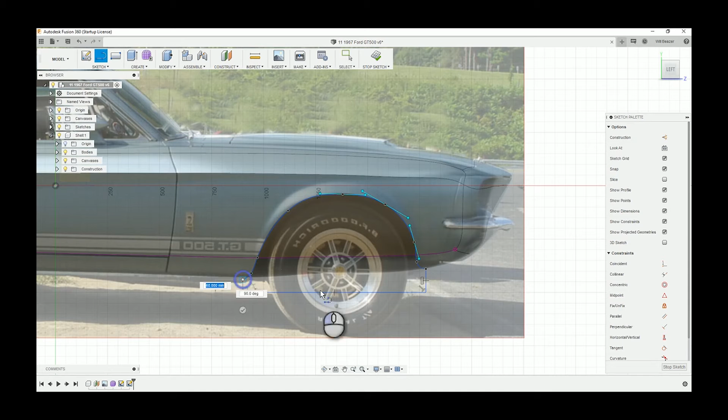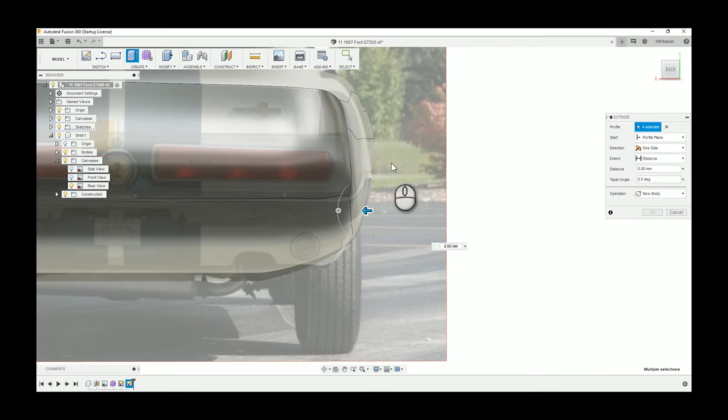So last time I sketched the wheel arches by just using the canvas and the fit spline tool. So here I am selecting the profiles I want to extrude and extruding them across. So naturally, when you extrude into a body that's already been made, it changes to a cut tool, which is that red. The red tells you it's using a cut. But say if you want to join it on, there's that drop down menu at the bottom and you just click join instead.

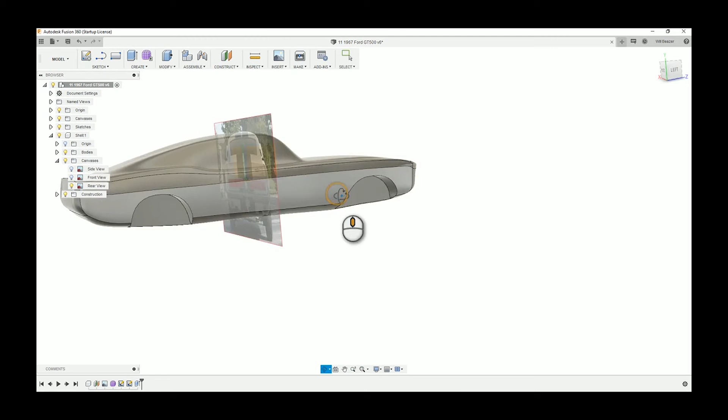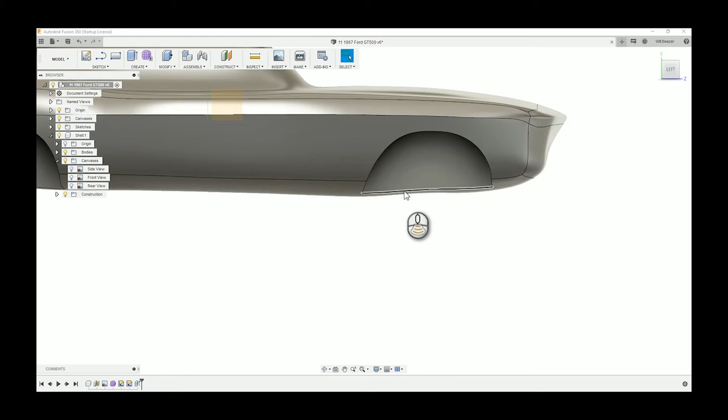I should mention, these wheel arches at this point in time, they are purely for aesthetics. They're not functional, they're not to hide the axle or the coil springs or whatever. They're just purely for an aesthetic reason. I could have done them a bit better, but at this stage I was just, let's start getting some features in, and then we can make all the tweaks we want when we're nearing the end. So I'm happy with that.

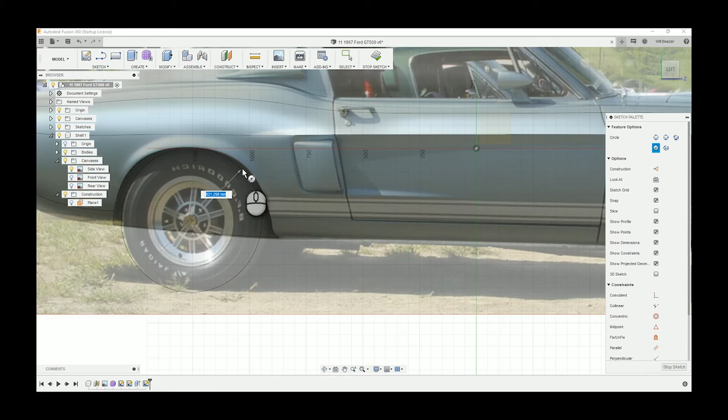So what I do now is I want to create a sketch to create the wheel, the first wheel anyway. So click create sketch. I want to find the plane. That's the plane I want to use. Then I hover over the wheel and I want to draw a circle. So I have that bound with my keys. So every time I press the letter C, it comes up with the create circle tool.

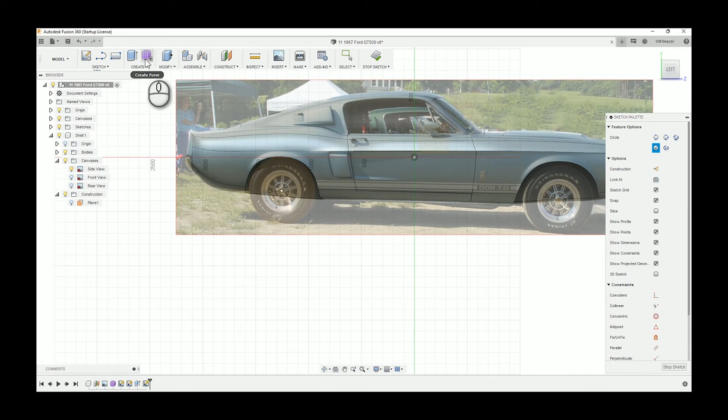And you can do that as well if you go into the sketch drop down list. If you move to the far right of any sketch tool, so say it says draw 3-point circle, there's 3 dots on the end, and it's like, do you want to make a shortcut for this? And then click yes, and you type in whatever letter. So C for me is circle. That's how I was able to draw that so quickly.

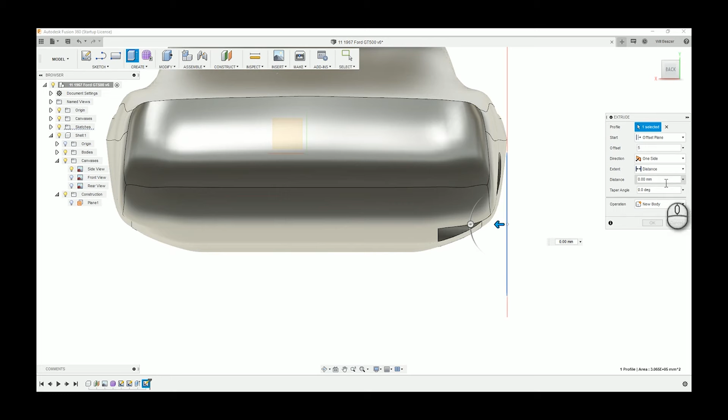And here I'm extruding the wheel across. So I'm actually offsetting this from the plane because the wheel isn't as far out as the sketch plane I drew it on. But first I'll offset it just to make it easier for myself. So there we go, just chucking in a random value. But yeah, I want to click and drag that and extrude it across. So because it's overlapping, it's actually used the cut tool here.

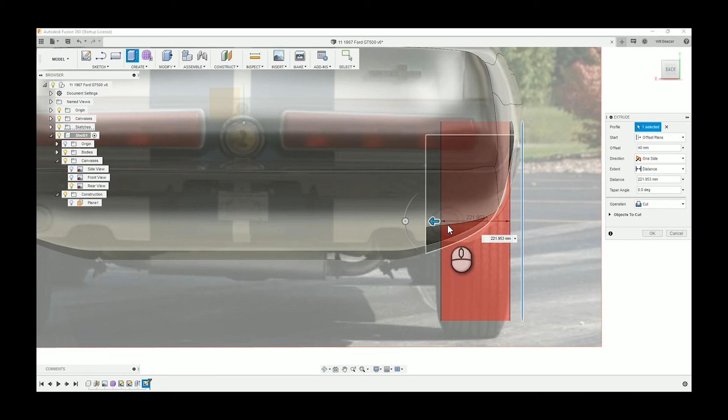And what I should do is at the very bottom of those tools on the right hand side in the drop down list that says cut, I should click new body, and I make the mistake of clicking join. I go back to fix it later, but just worth mentioning now, you don't want to click join because when you go to move it or mirror it or create a pattern out of it, you'll be patterning the whole car as well. So say you mirror the rear wheel on the right across to the left hand side, you'd also mirror the car and basically create an overlapping body, which is just a computer nightmare.

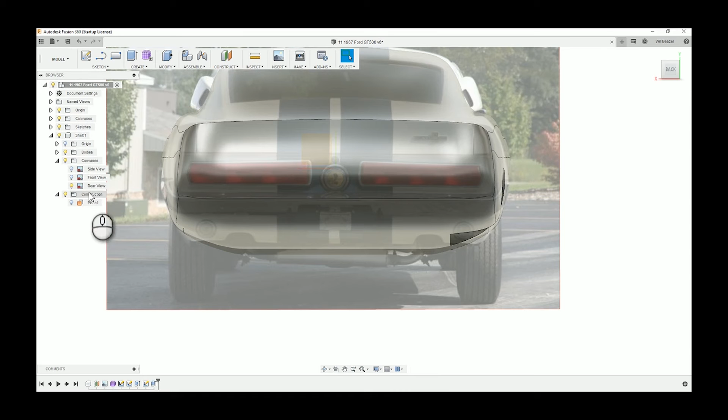So there, it was set to cut. So I need to edit that feature. And like I said, I clicked join, but I should have clicked new body, because now that becomes one body with the car. That's not its own separate thing. You can still edit it, but yeah, like I said, when it comes to mirroring things or moving things about, you'll be moving the whole car as well.

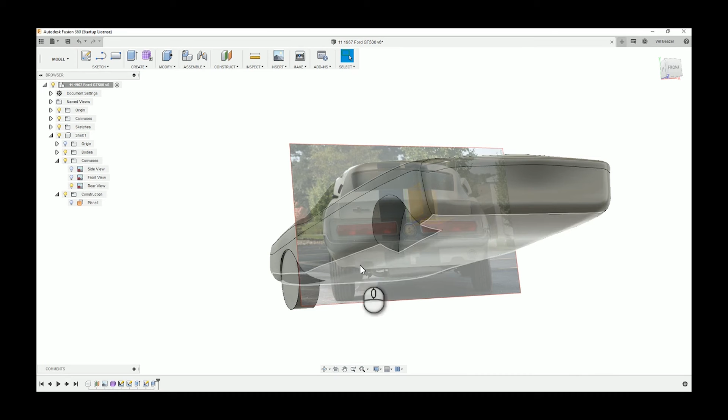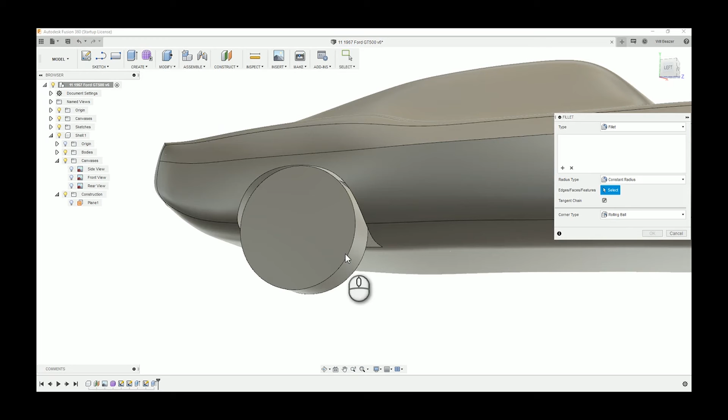So because wheels aren't perfect cylinders, they curve around at the edges, the next step I want to do is fillet the edges of the tyre. And again, this is a mistake I make looking back on it now that I know the tools I could have used. I click the fillet tool, and in the top of that table on the right hand side it says fillet, and there's a drop down menu, and you can also click rule fillet. So if you click fillet as standard, you have to select each individual edge that you want to fillet.

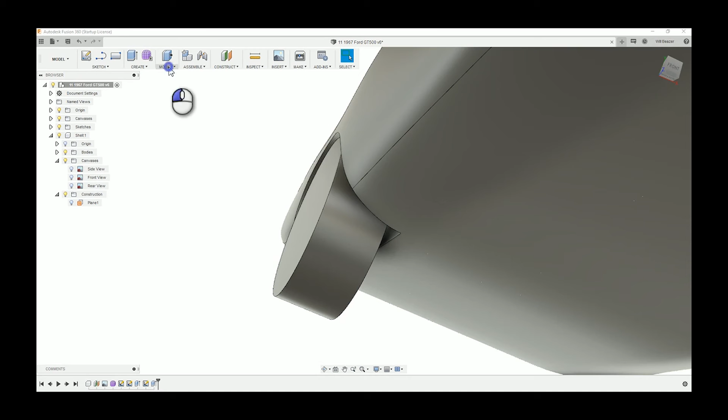But had I created the wheel as a new body and not joined it onto the rest of the car, then I could have used the rule fillet tool, where I could have clicked on the wheel and then just entered a value, and it would have filleted both sides automatically for me. So it would have saved me time, and it would reduce my steps in the feature tree. And it's definitely good practice to do the steps that make the most sense.

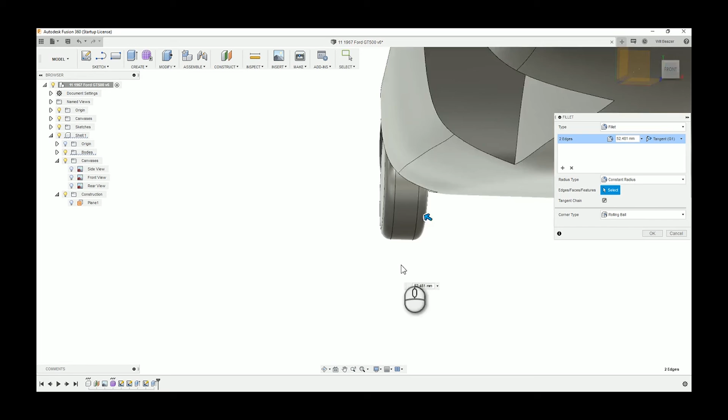I know that sounds ridiculous, but sometimes when you're modeling for as long as I was during this project, you start to just make silly mistakes. But there's also a lot of mistakes I make just because I wasn't aware of better ways of doing it, or at least on this program.

So here I'm creating a sketch. I clicked on the wheel, so you don't always have to click on a plane. You can just click on a body as long as it's got a flat surface. And then again, drawing a circle.

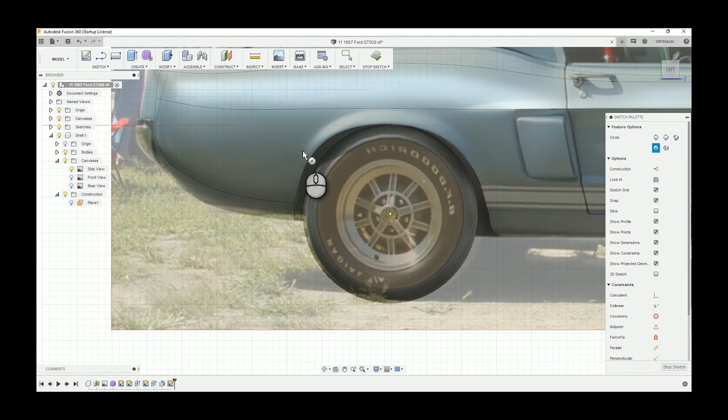No dimensioning here, I'm just drawing it to match that up. Realistically, I could dimension this bit here. There wouldn't be any harm in me doing that, but I don't think I do. And I could open up this model and add in some dimensions if I wanted to be a bit more accurate. But again, like I've said in previous videos, this is just an aesthetic model. It doesn't have to be perfect.

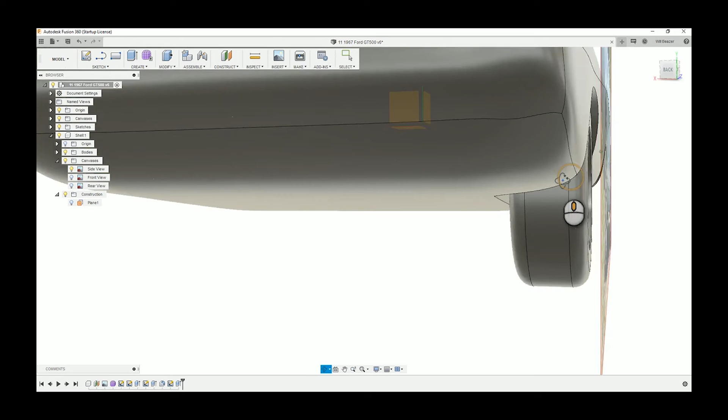So yeah, extruding that to about 20 mil. Extrude cut. So I have a look at that. Turn off that canvas, and it doesn't look deep enough to me. I probably want about double the depth. So I do that by clicking edit feature in the bottom, and then just changing that measurement. So that depth is like 40 mil, something I'm happy with.

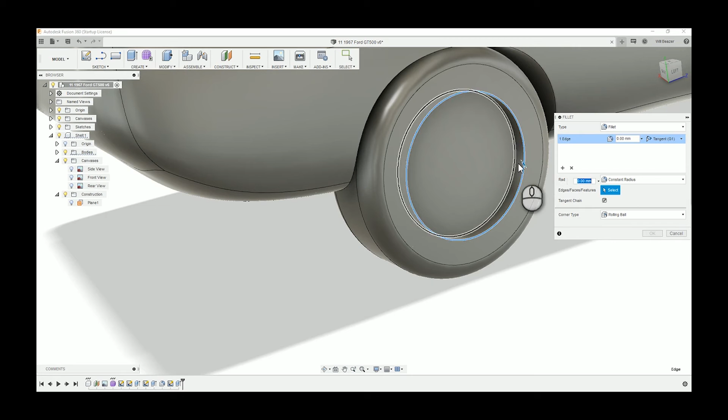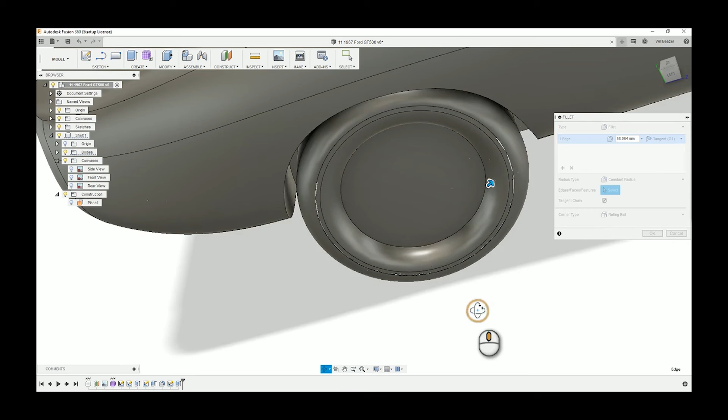So what you're now witnessing is a bit of poor model procedure. Here I've just done a cut, and then I've just done a fillet, and I do that a few times in this project in later videos. But with things like this, I know I'm going to have to fillet this wheel again for other edges. So doing a cut after a fillet, what you actually do is create more problems in your feature tree at the bottom, and it's just going to be more taxing on your computer. So I'm kind of happy with how that looks.

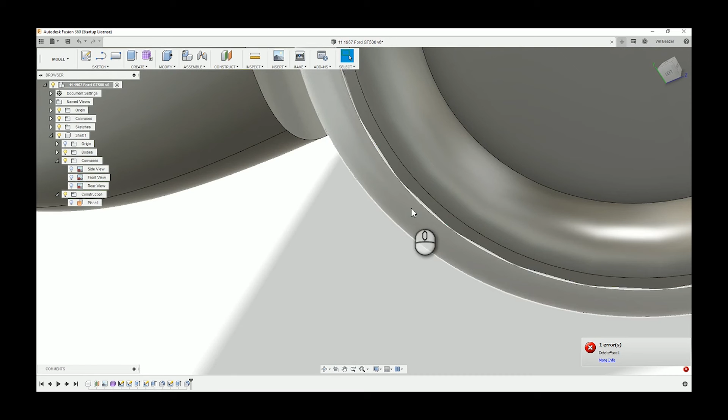And then I zoom in and I notice this. So what all this is here is a compute error. There's nothing wrong with it. The model is perfectly functional. I could take it out and 3D print it, and there would be no problems. But it is a good habit to get into. Whenever you spot something like this, just see if you can do something to fix it. Because if you ignore a lot of your problems, then your CAD projects will fail eventually if you just keep ignoring the problems on it.

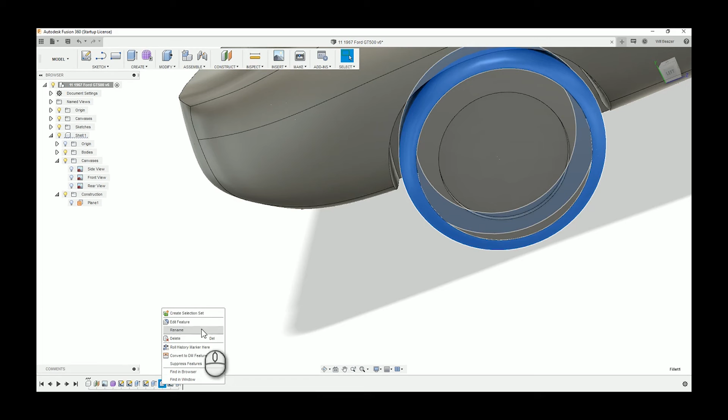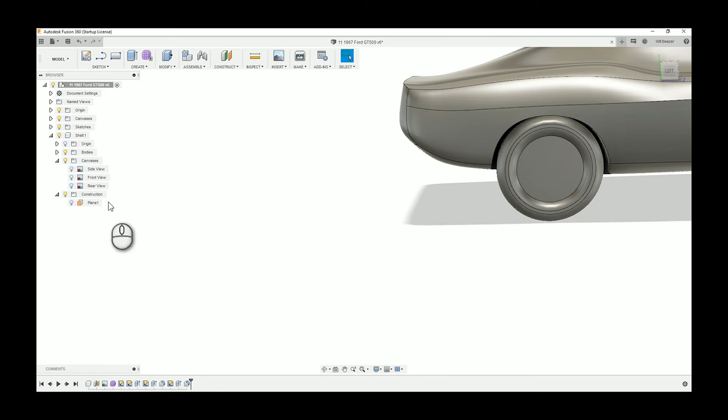So I just wanted to see if I could fix this, but I do recognize there is actually nothing wrong with what's going on. It was just a bit annoying, to be honest. So I was just seeing if I could fix it, and the fix was to just edit the feature and do absolutely no editing, just clicking OK again, and it worked the second time around. But yeah, just a good habit to get into. So that's looking a lot better.

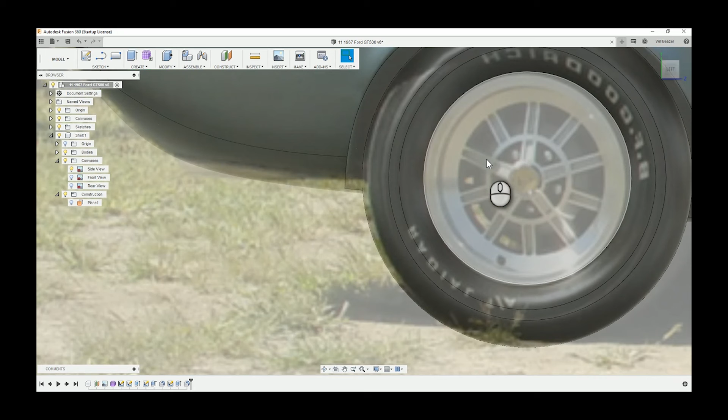So as I've said before, this wheel is still joined on to the car, and I will change that shortly. But first, what I want to do is create a plane that is perpendicular to this view that I'm looking at, which sits halfway between the two sides of the wheel. If that makes any sense, you'll see what I mean in a minute. But the way I go about this is fairly moronic. What I do is I create a sketch from one side and then extrude up to it.

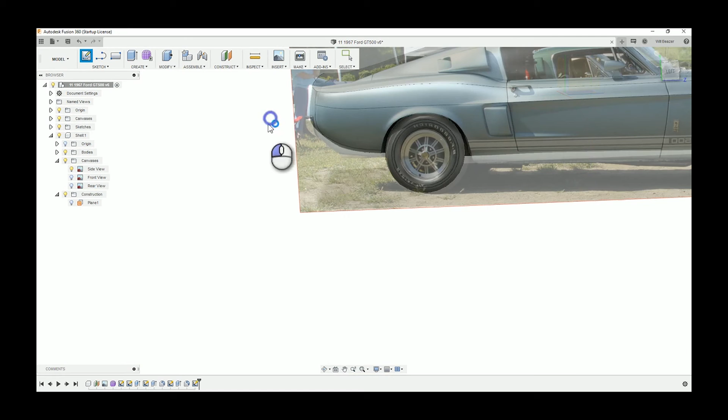What I could be doing here, instead of creating a sketch, is in the construct tool, the drop down at the top, there's construct offset plane, but there's also construct axis through cylinder or cone. So if the wheel was set to a body rather than joined onto the car, I would construct an axis through it, and then I would extrude a plane up to that object, and I would solve my problems. But instead, what I've done is I create a little sketch, and then I extrude up to it.

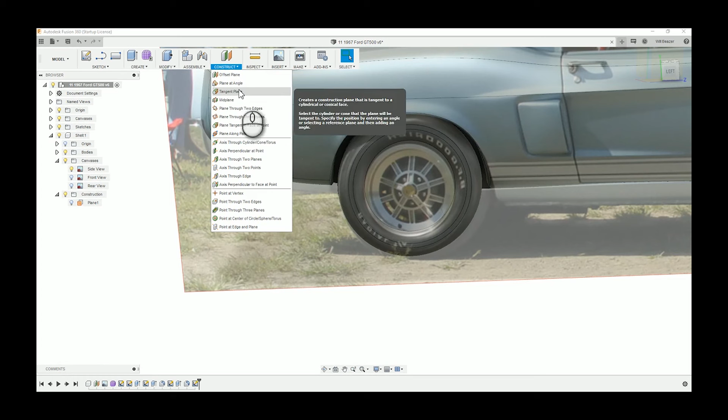So here's the construct drop down, so offset plane, and what I want is a plane that's on level with where I've just clicked. Trying to think what the plane would be called. The front to back plane. I don't know. A plane perpendicular to the side view. So perpendicular to what I'm looking at now.

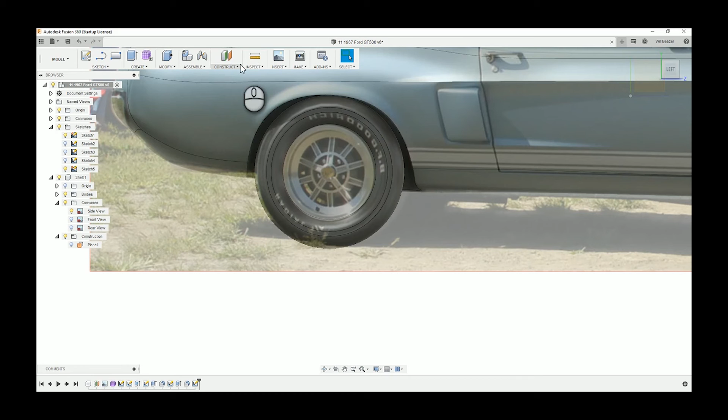And you'll see there's that arrow on the top right hand side, and I can drag the plane. But what I should do is in the drop down menu on that table for the offset plane, instead of distance, you can click to object. So it moves it up to an object. See where it says distance on that table? Then click to object, and then I can click on that sketch. There we go. And now the plane is where I want it to be.

But from being a bit more experienced now, I do know that's not the best way to do it. So like I said earlier, just construct an axis through the cylinder, through the wheel.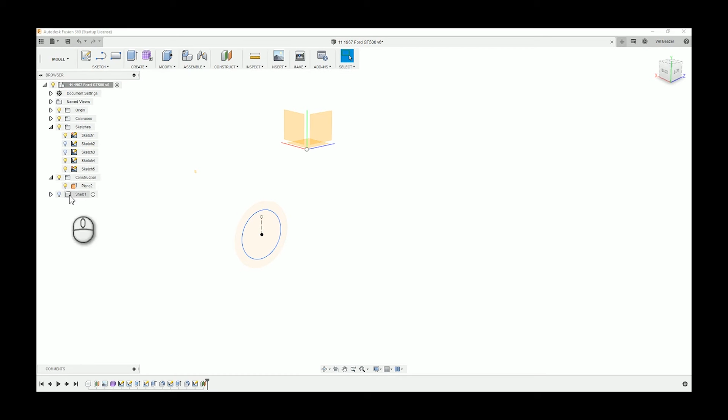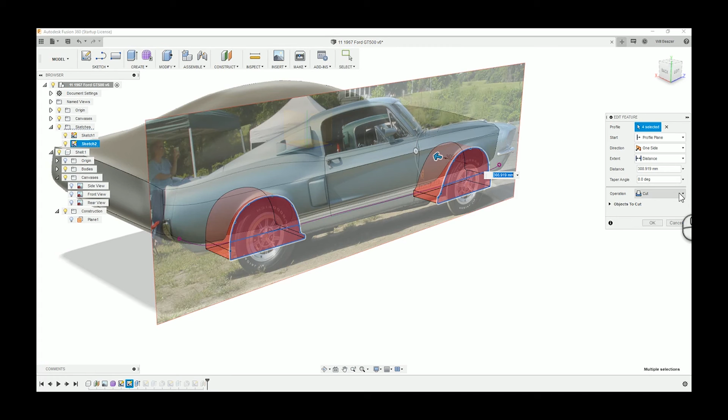That plane that I've just created is actually really hard to see. If you look left of the tyre and up a bit, it was just in the screen there, but I couldn't find it for a little while. Luckily I didn't need it right away, but sometimes that will happen when you create a new plane. Sometimes they create them massive, sometimes they create them tiny. I honestly have no idea why it happens, but I was struggling to see it.

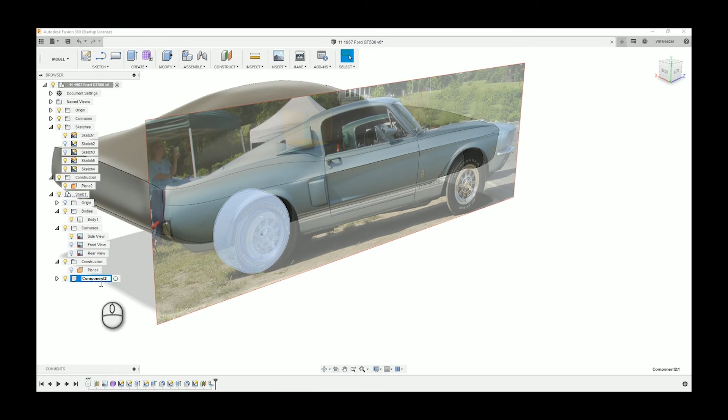So here we go. I'm changing the wheel from a join to a new body, and now I can create a component from it. I do that by going into the bodies, finding the body, right clicking, create components from bodies. So now that's in the top tier of the tree on the left, and I can rename that by double clicking and then typing in wheel.

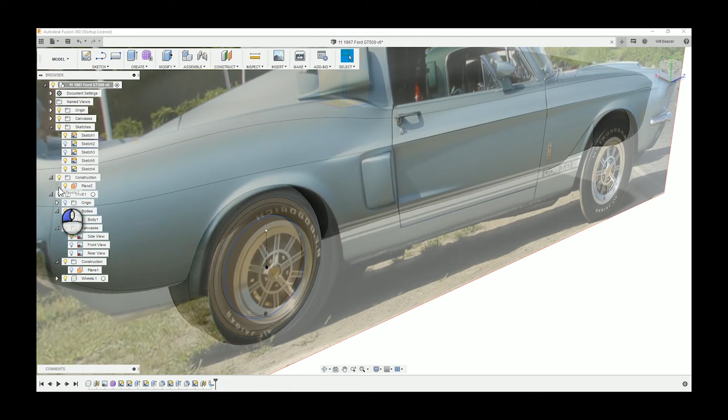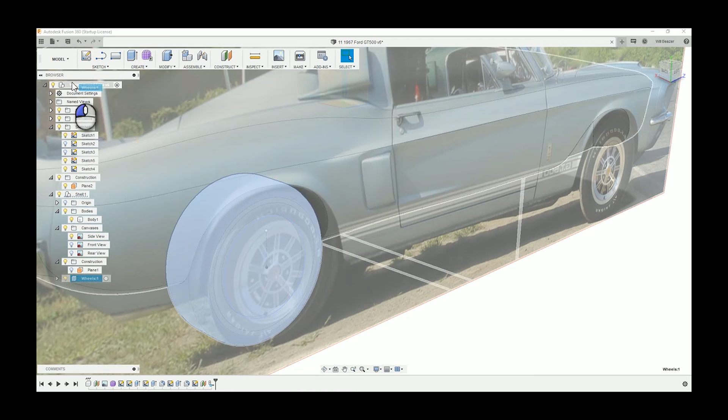You should get into a good habit of good naming conventions when modeling. For a car, it's really easy. There's only so many parts. It's like rear wheel right, rear wheel left, etc. But on a project where, say you were making a chest of drawers, there's a lot of parts of wood, and you don't really know what their names are. They're just panels, and calling them panel 1, panel 2, etc. is quite difficult. You should try and figure out a good naming convention that works for you. I still haven't mastered good naming conventions, but it's something you should try and practice.

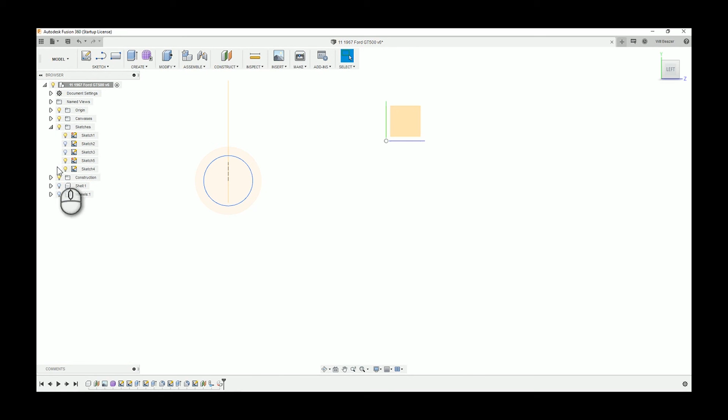So now there's that plane that I couldn't find before. It was tiny, and now I dragged the corners out to make it a lot bigger. Now you see what I mean. It's a plane that's perpendicular to the wheel in the dead center. What I'm about to do now is another thing that, if I did it now, I just wouldn't have done it this way. What I'm going to do is draw an axis. Like I said, you can just construct an axis. It's so much easier: construct axis through cylinder, and then just click on the wheel. But instead I draw a sketch from a perpendicular view to this.

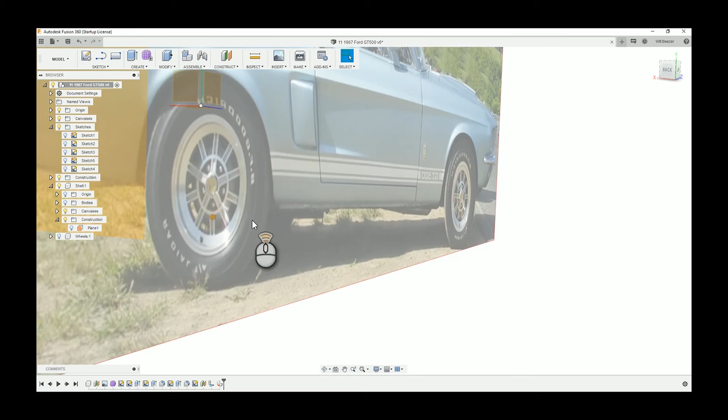Just having a look at the wheel to make sure I know what I'm doing. What I want to do now is turn on that wheel. I think I turned on the car first. I didn't mean to do that, but show the wheel, and then by clicking on a body and holding, you get a little drop down menu of entities that you can't see directly, and there we go, there's that line.

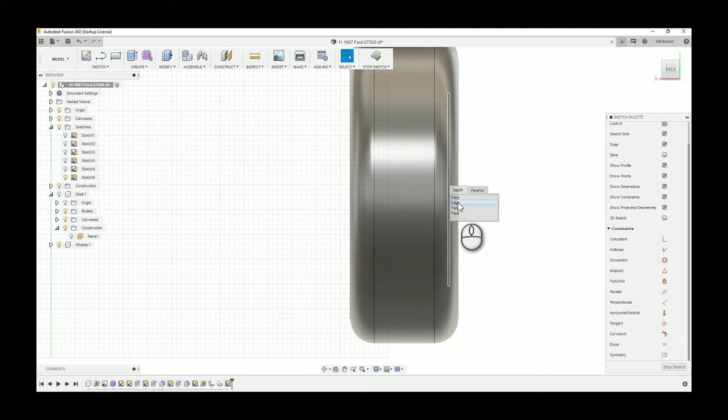So that's the inner circle that I cut in before, and then very quickly I used the project tool. Again, that's another key I have bound. I bound that to the letter P because it's unused for anything else. But you can find the project tool in the drop down menu on the sketch tools at the top.

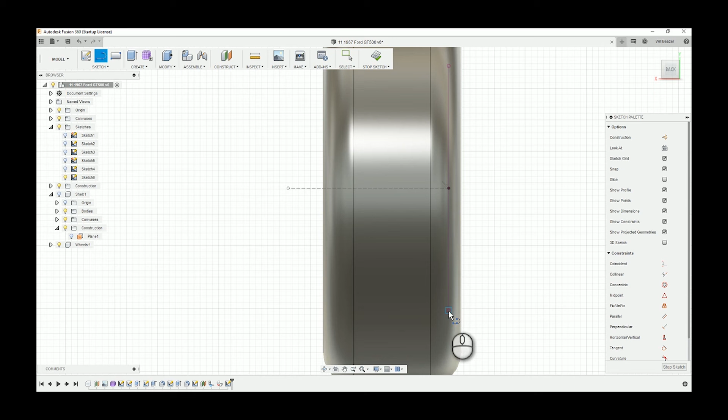And this is me making an axis. I needed to create an axis, and had I known about the better way of doing it, I would have done it the other way. So just construct axis through cylinder. I'm sorry, I feel like I'm repeating this a lot, but it's a tool that I completely wasn't aware of, and it's so much easier.

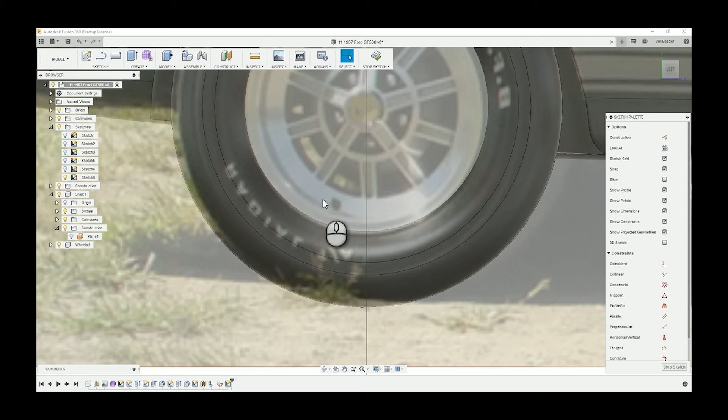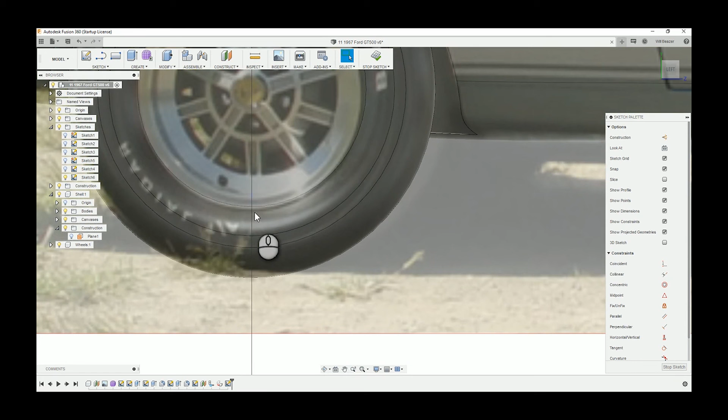So now what I want to do is create the shape, because this wheel goes in, but then it comes back out again. What I want to do is create a sketch from that new plane I've created that's perpendicular to this view, then rotate it, and have that join onto the current wheel to set me up ready for the next stage. You'll see what I mean in a minute. It was not the best explanation, but you'll understand what I mean in a moment.

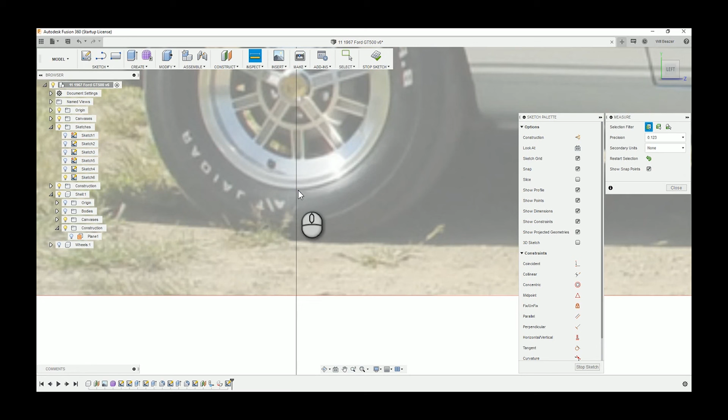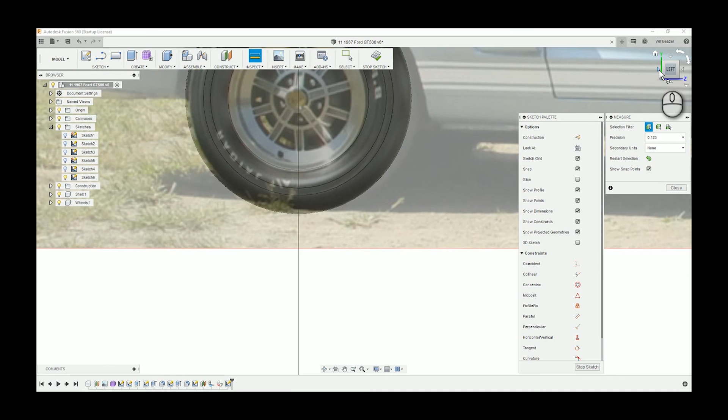What I could do from this angle is, in the sketch drop-down menu, you can create points, and I could have created points at each stage of the wheel from this angle, and then rotated it back round to the angle I'm about to work on, and I would have been able to see them rather than doing all those sketches.

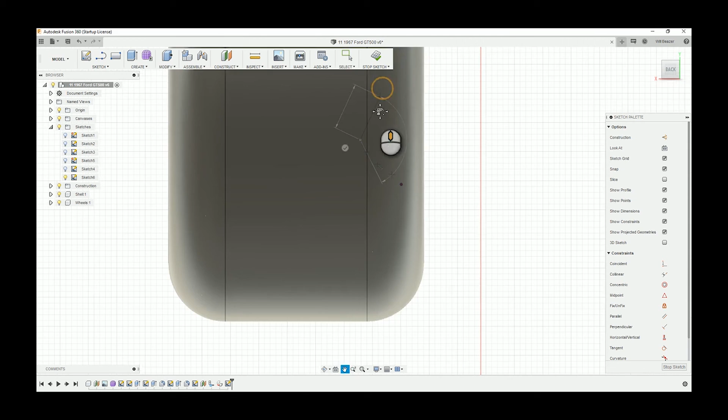So in this part of the sketch, I actually dimension some things, which I don't think I've done at all for the rest of the project, really, like not proper constraining. And the reason why is that in this case, it makes it very easy to edit by having some dimensions in there. Not always, you know. Sometimes it's not necessary. If you're just going to be happy with it straight away, then fine. But I thought I was going to encounter a few errors with this, so I thought I'd chuck in some constraints and play on the safe side.

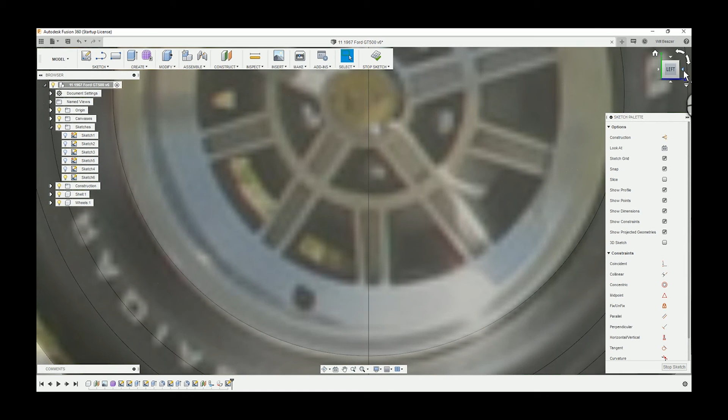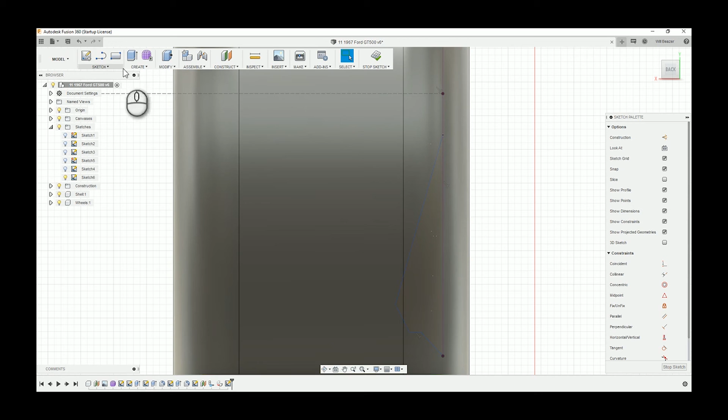So naturally, dimension is key bound to the letter D. You can click it up at the top when you're in the create sketch environment, but when you're in a sketch, just press D and you get the dimension tool up. I'm fairly certain it's key bound to it anyway. It might have been me key binding it, but I think it's one of the ones they have actually bound. So there we go. Press D, click on those 2 points, just drag that out.

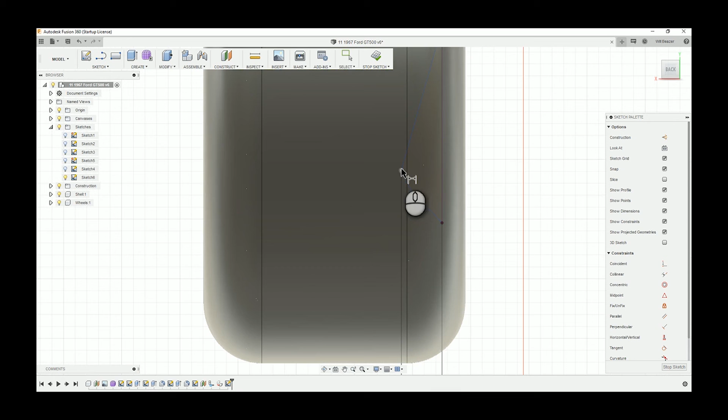And I'm about to say something that you should already know. I'd be kind of surprised if you didn't know it by now, but when you're working on a sketch, if the lines are blue, that tells you it hasn't been constrained yet, so things could still move about. But when the lines all go black, that tells you that it's been constrained and the lines can't move, so it's perfect.

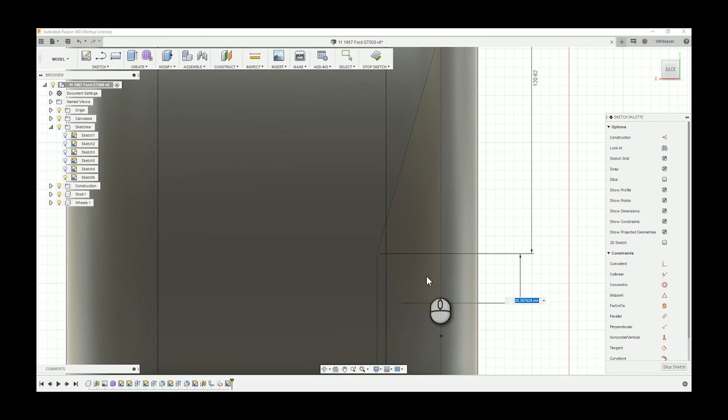In other projects as well, you don't always have to constrain things. You don't always have to put in tons of dimensions. For projects with lots of right angles, you can use the tools where you click on a sketch line and you can select parallel or perpendicular, which I do a lot more of now. I wasn't doing so much back then. If you click on a sketch line without any tool on, then you get the options at the top, and you can make this parallel, you can make these coincident, you can make them collinear, and that's quite a smart way of constraining things.

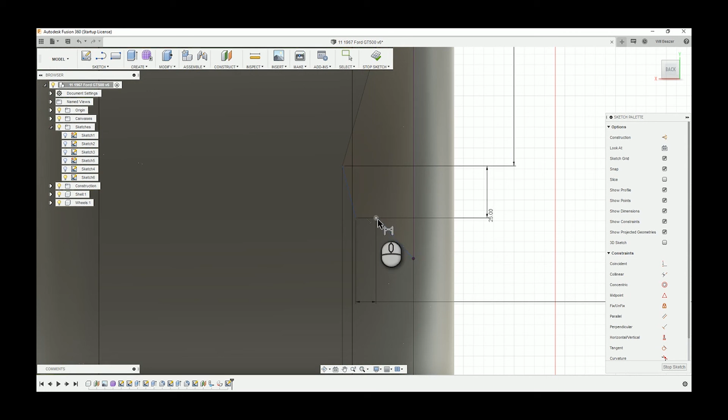And you could also model in the parametric table. I might go on to that in a much later episode. I don't go into any of that in this particular project, but it might be something worth looking at. So now the lines are not blue anymore. They've all gone black, and that tells me that they are constrained.

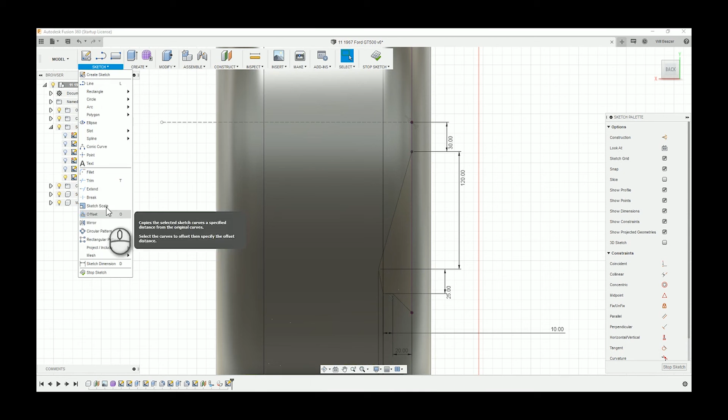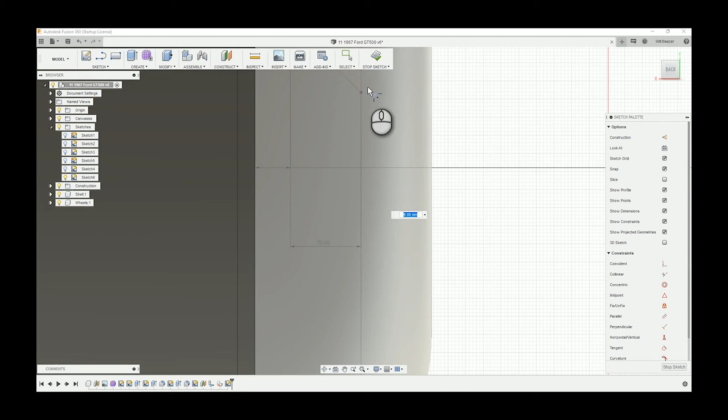And what I do now is I fillet these, and this is moronic, really. When you fillet, you kind of remove the dimensions. You don't remove them fully, but it changes the constraints. What I should have done is sketched it as the really angular thing, then done the revolve cut I'm about to do, and then filleted it as a 3D object rather than as a 2D sketch. Because when you fillet that, some of the lines are not looking so good anymore, and I had a few messages come up. If I'd kept it in that very angular state, all of that would have been fine.

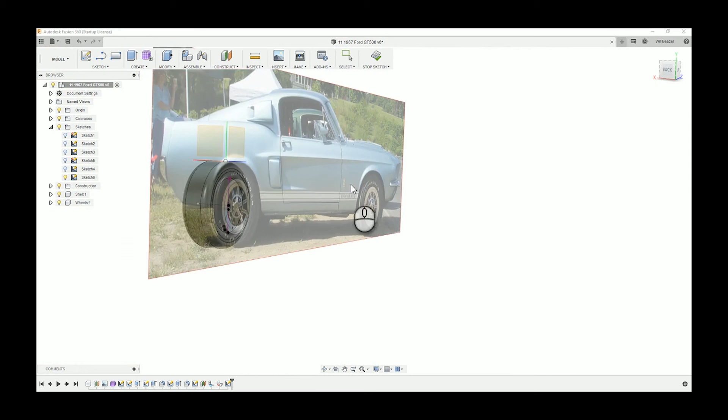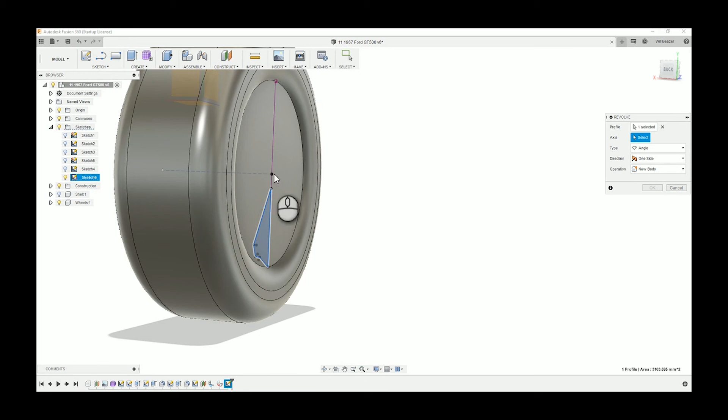So now creating a revolve. So I click that profile. Hide some things so I can see it. I want to hide the canvas really. There we go. Profile, and then clicking the axis. Again, I should have just made this axis with the construct tool, but instead I sketched it. And there we go. That creates that shape I was on about earlier that comes in and then comes back out.

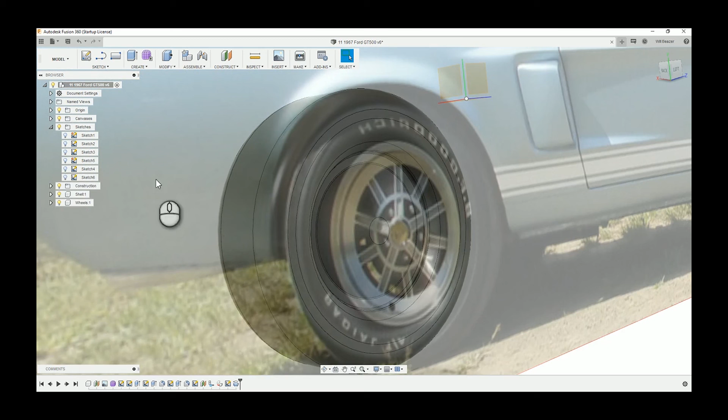And like I was saying with the sketch, rather than filleting those edges in the sketch, I could have just filleted it as a 3D object, and that wouldn't have caused the problems. Well, there weren't many problems, just the brief messages that came on screen. Yeah, so there we go. Got one wheel done.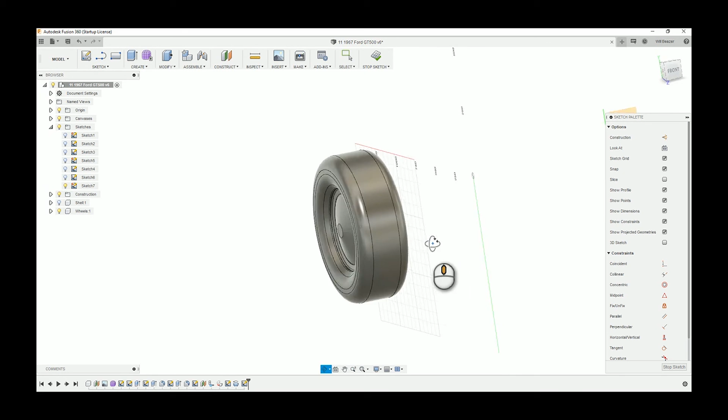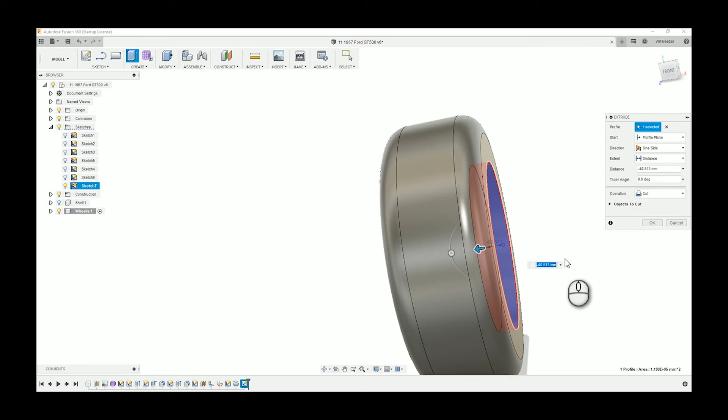I know this was a bit longer than the usual episode. The reason is I wanted to cover the wheel in one episode. There's still more to it, but the main shape is done. And then I created a quick sketch on the back, so it's a bit more wheel-like by extruding that cut in. It looks a bit more like a wheel with a tyre on anyway.